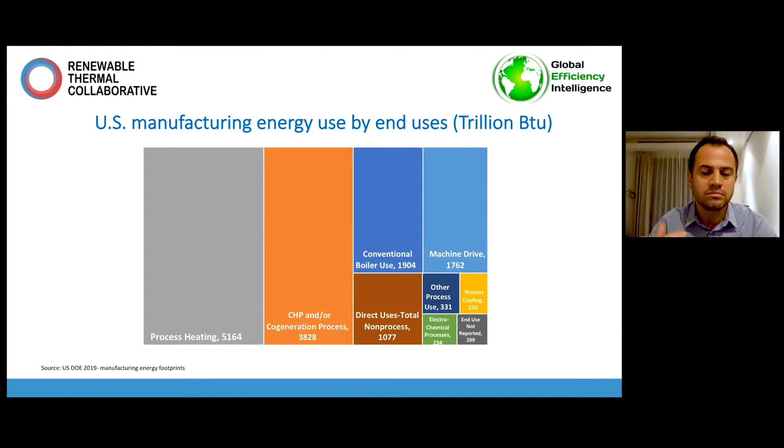US manufacturing energy use, as you can see, goes to different end uses, but very clearly this graph shows that around 2/3 of energy goes to thermal related processes, meaning process heating, CHP, or conventional boilers. And the majority of energy used there is fossil fuel. So there is substantial potential to actually switch to electrification.

Another thing, when we talk about electrification, sometimes people jump into the hard to electrify sectors, for example, the cement industry and high temperature, and basically talk about industry being difficult to electrify. But if you look across different industrial sectors, the heat demand profile is very different. In many industries, a substantial amount of heat use is actually low or medium temperature, which relatively speaking is easier to electrify. With some exceptions, like the steel industry, which is high temperature, and we already have a very mature electrification technology, electric arc furnaces.

As you can see, for example, the graph on the right-hand side from NREL shows that about 2/3 of the process heat used in US industry is for applications below 300 degrees C or 572 degrees Fahrenheit. So again, relatively speaking, this amount of low to medium temperature process heat points us to a good potential for electrification.

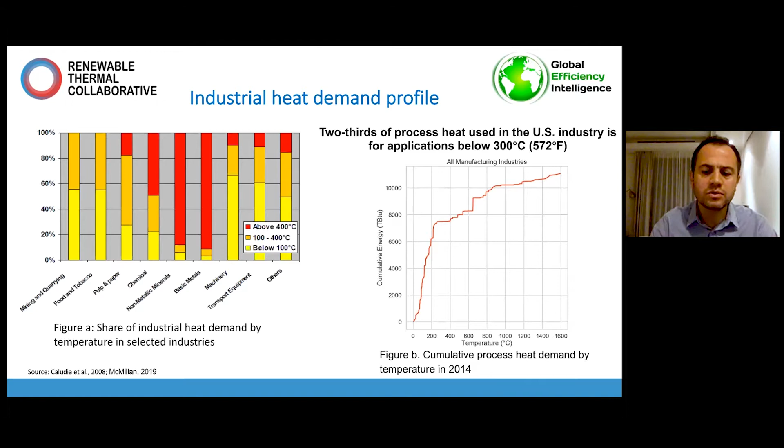So we did what we call bottom-up analysis for all the sectors listed in the table on the right-hand side. We also did a whole different scenario for electrification of all industrial boilers in the US. But for the subsector level analysis, we looked at the existing heating system in each sector. And based on the temperature profile, heat demand, and how heat is used, we looked across the portfolio of electrification technologies to see which one is more suitable for each sector. Then we assessed the process integration for the electrified technology into that particular process in that sector. And based on that, we did analysis on energy saving potential, GHG reduction potential, and cost.

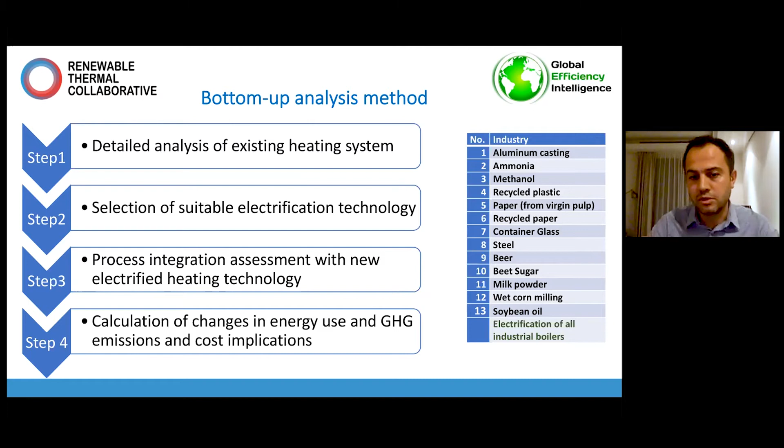Because of time constraints, I'm going to briefly show you results for 1 or 2 cases that we have done. But again, in the report you can find much more detail about these for all the sectors, including very detailed descriptions of conventional versus electrified processes.

Since we're talking about high temperature industry, one of the high temperature subsectors we looked at was container glass. Container glass accounts for about half of the glass produced in the US. It's within the non-metallic mineral sector, so it's an important sector. In this table, the orange column in the middle shows the different process steps for producing container glass.

On the left-hand side, we show the conventional process and different heating equipment that is used and the energy intensity in terms of electricity or thermal fuel intensity for each process step. And the right-hand side is what we constructed, an all-electric process that, based on our research, we suggested can replace the conventional process. And we have also given the electricity intensity associated with each process step.

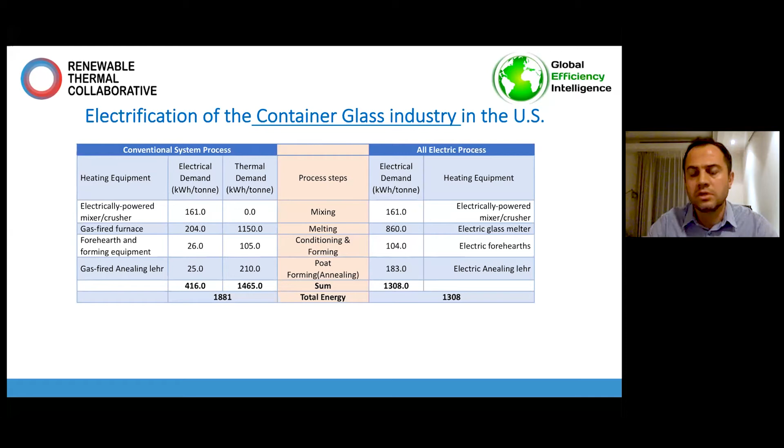And as you can see from the bottom row, when comparing conventional and electric process, the all-electric process uses a substantially lower amount of energy in final energy terms. So we get some energy benefit there. And those were the intensities.

When we apply that for the entire container glass industry in the US, these graphs show the energy and CO2 implication. The graph on the left shows the change in total final energy use after we electrify the container glass industry. The values are negative, indicating the reduction in final energy use. So you can see this is the total technical potential. We didn't assume a certain kind of adoption rate. We just wanted to see what's the total potential. Of course, in reality, the implementation will be more gradual.

But in terms of total potential, you can see we get a substantial amount of energy saving if we electrify the container glass industry. And the good news is actually for this sector, all the technologies are already commercial. So we need more adoption.

And when we look at the CO2, it's a slightly different story. The graph on the right shows the change in the net CO2 emission after electrification in each year. We have done some projections as well up to 2050. You can see we get some rise in CO2 intensity after electrification. That's because we use the average US grid emission factor. And so basically what we are saying is the US grid is not clean enough if we just suddenly electrify.

But as we decarbonize the grid based on the assumptions you see in the table below, we then get a substantial amount of benefit in terms of CO2 reduction. Another thing to note, this is for the US. If you do regional analysis, which we hope to get support to do down the road, like if you look at certain states where the grid is cleaner, this can change. For example, if you do the analysis for the state of Washington, probably immediately you will get your CO2 emission reduction because the grid is relatively cleaner in that region.

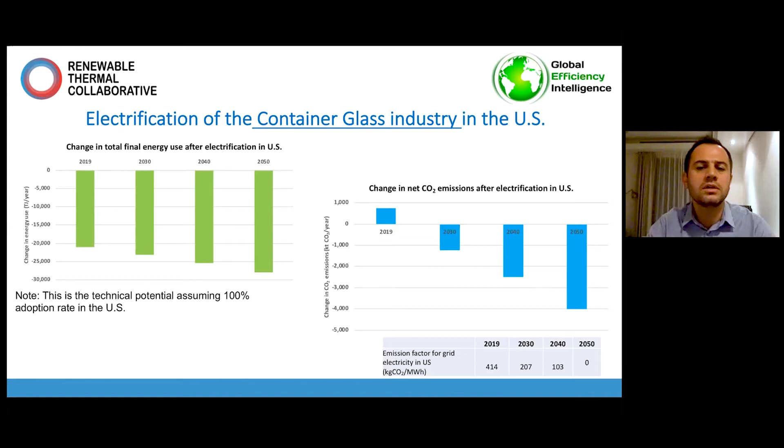We did some cost analysis for energy cost only. So the energy cost per unit of product, in this case, per ton of glass. This graph shows the energy cost per unit of product for the conventional process versus the electrified process in 2019 and 2050. Blue is the natural gas cost per unit of product and orange is the electricity cost. So as you can see, the electrified process costs almost twice as much as the conventional process.

And that's primarily because in the US, as Colin mentioned, natural gas is for now pretty cheap. That may change in the future, probably will change. And electricity is relatively expensive. So in our initial presentation, we got feedback from quite a few people that renewable electricity costs are going to go down more. And we did some sensitivity analysis by showing those error bars, basically showing what if the price of electricity goes down by 50%.

So if you want to see that scenario, basically you compare the lower end of the error bars. And in that case, you can see the electrified process is quite cost competitive compared to the conventional process. One other thing to add is here, we did not take into account any carbon price that may come into the picture in the future. If that is included, then that blue bar will be higher in terms of the cost of natural gas. So that can also have a significant impact.

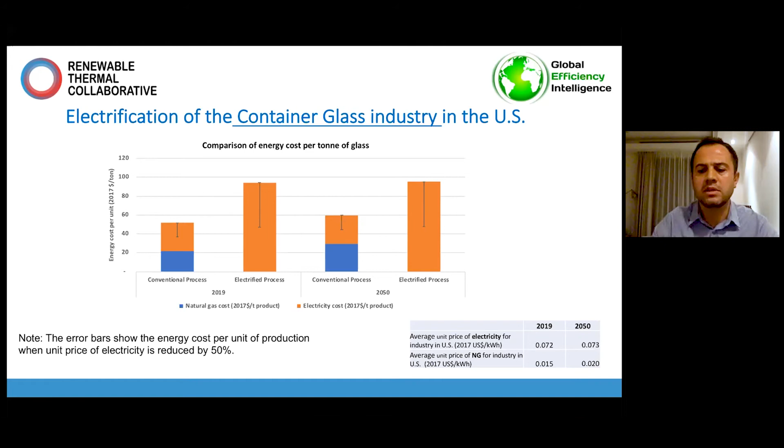So that was an example of the sector-specific analysis we did. In the sector-specific analysis, we looked at the end-use processes and then we electrified those. Another scenario is you actually don't touch the end-use processes because they are not at the end of their lifetime or it's complicated. You just go and electrify your boiler in the boiler room. In that case, the changes are mostly in your boiler room and there are some advantages to that.

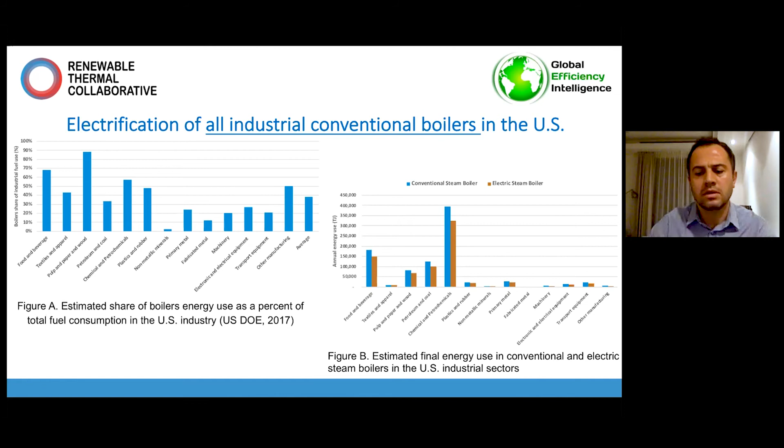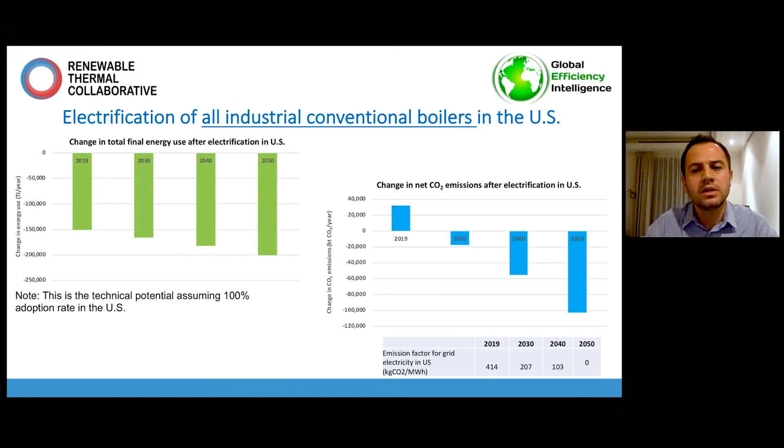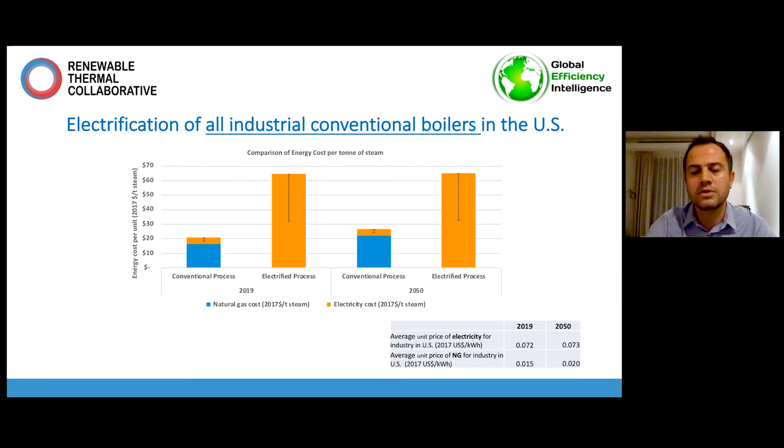One other thing I add here on the cost, these cost analyses are only energy costs. So we didn't compare the capital costs or change in operation and maintenance costs or any other. So if you do a full life cycle cost analysis, taking into account other costs and maybe non-energy benefits, it might be a different picture and electrified processes might actually look much better. So that's probably a topic of future study.

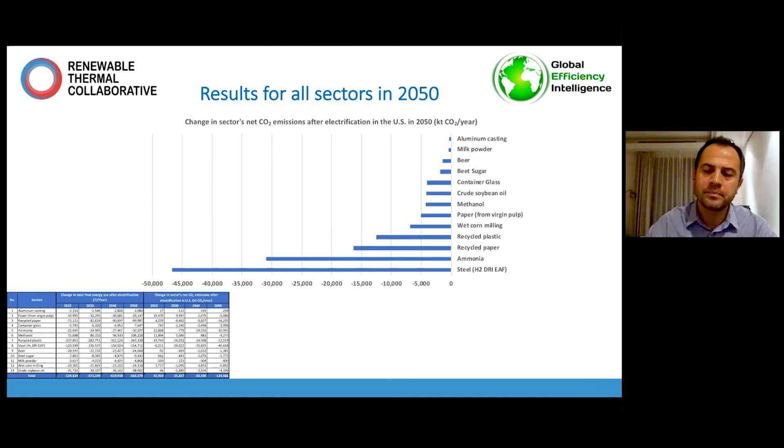Also, things that I do not have time to go over in this presentation that are included in our report are discussion on barriers and opportunities based on our survey. I think you will find some of those findings really interesting. And we have around 8-9 pages of detailed action plan where we have given recommendations for government, industry, utility, and technology providers with regards to different items of the action plan, whether it's R&D, economics, education, policy development, etc., that we have discussed in detail in our report as well.